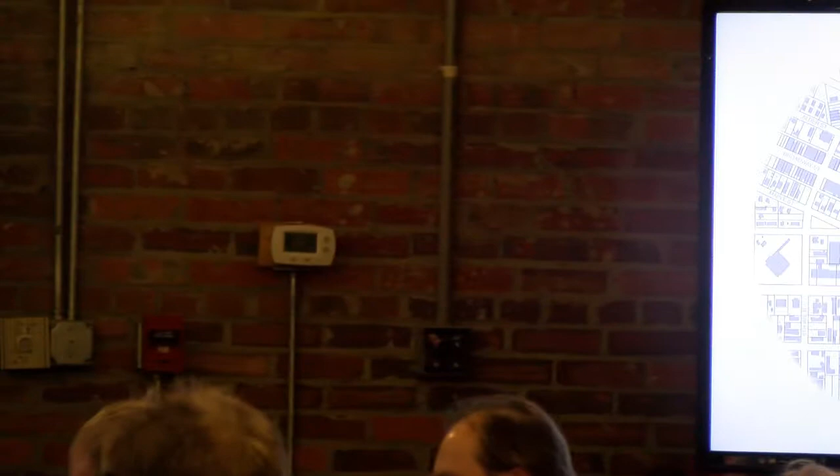Mayor, I'd like to introduce our Benchmark planning team that is here. We have Dan Douglas. Dan is from Raleigh, North Carolina. We've got Jason Epley, who's from Charlotte, North Carolina, and Monica Gall, who works with Jason in Charlotte. These guys have been tremendous. We are very lucky to have been introduced to them, and we're glad that we chose them to be a part of this. They're really giving us some great examples and recommendations, and I'm excited for you to see them. So with that, I'm going to turn it over to Dan, and Dan's going to take over.

Thank you, Lauren. And I want to also thank Lauren's staff, Brian and Frida, who've been very helpful to us throughout this whole process with logistics and setting up all the various meetings. So tonight we're going to present on the walls. You see a variety of conceptual development options for different parts of the city, and on each table there is an 11 by 17 version of those that we're going to ask you to write on and provide feedback on, and leave at the table when you leave.

So please don't take it with you, especially if they have writing, because this is how we're collecting your feedback tonight. And there should be a full set that includes every one of the posters you see on the wall. So if it's a little too small and you can't read it, you can always go up to one of the bigger ones. And I'm going to present a sort of summary of how we got where we are today, then a summary of these sketches, and then we're going to ask you to spend about 45 minutes talking about the different concepts, what you like about them, what you don't like about them, any other ideas you might have that we didn't uncover in our listening sessions. We want to hear those.

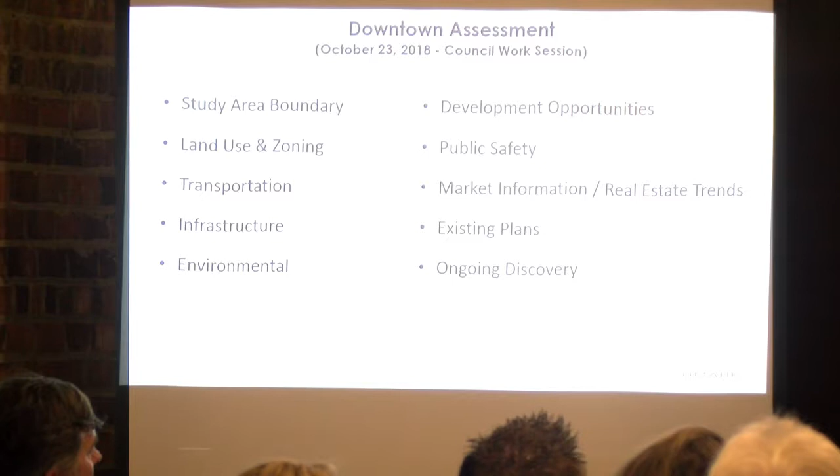And so let's start off with the vision. And we tested this through the council in 2 council meetings that were open to the public. And what the vision statements you're going to hear are, and that are written on the boards back there, is we're describing the future as if it already happened, right? It's not a we want. You're describing it as if everything in this plan has been implemented and the future that we all wanted is here. So you've done some vision workshops with the chamber, and the DRC did an internal one.

And we think, geographically speaking, that downtown is sort of split into 3 different identities. From Kings Highway to the ocean is sort of oceanfront. It's mostly hotels focused primarily on tourists. And then you have the Kings Highway corridor, which is not that different than any highway corridor or bypass in any city you've been in that has the fast food joints and retail establishments, those sorts of things. And then you have, we call it historic Main Street, but here it's called Broadway. So then you have this historic Main Street district. And what links all those together is the pavilion, the super block, and the building we're in now. So this is kind of the key link that brings all of those various districts together.

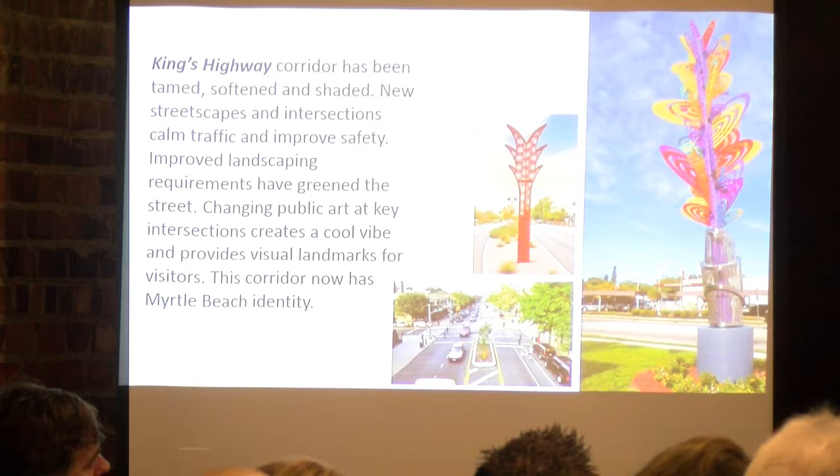Right, so if you drive Kings Highway from Georgetown to the North Carolina line, I'm willing to bet it'd take a special person to know what city you're in. It's gonna be pretty much what we call generic the whole way. It's the same stuff you see everywhere. So we heard that you want this section of Kings Highway to have a unique identity.

Broadway, Main Street, the historic heart of downtown, is flourishing. Empty nesters, young couples, and families are living, working, and playing along the street. Most neighbors in the revitalized residential areas surrounding downtown just walk and bike to Broadway on new greenways, trails, and sidewalks. Small independent services, professional offices, and retailers are taking hold, and locals have reclaimed Main Street.

And then the Arts District is this super block to the pavilion, basically where we're standing now. The Arts District is a perfect weave of arts, culture, craft, and creativity. It draws locals and visitors year-round with live performances, craft beer and spirits, a small food hall, and a market, all in unique and historic structures. Across Kings Highway, the Old Pavilion is a lively, new mixed-use destination that delivers thousands of daily visitors.

So those are the sort of four overarching statements that are guiding the development of the plans you see on the wall and on your table. And we're happy to edit them. You can make changes on a Post-it note, and they're all just on the way out the door there. The posters have that text.

And so the goals, themes, and strategies were where we tried to, through all the listening sessions and everything we heard, group initiatives and concerns around similar topics. So we heard a lot about we have to create a new identity and a niche in the marketplace that's different than the rest of the coastal environment. We heard almost in every meeting about the perception of safety in downtown, whether it's real or imagined, and what we can do to try to address that.

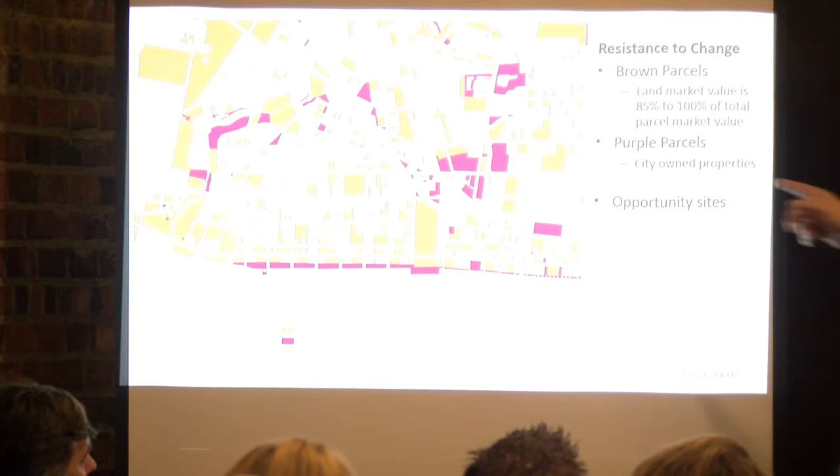So this highlights any place where there's vacant land, surface parking lots, or places where the value of the building is less than the value of the land. Everything here in the ochre color meets that category. Everything in the pink is publicly owned by the city, the county, or the state. Okay? And so out of that we developed, and this was presented to the council and through the workshops, a sort of development framework, which is how are we going to organize ourselves?

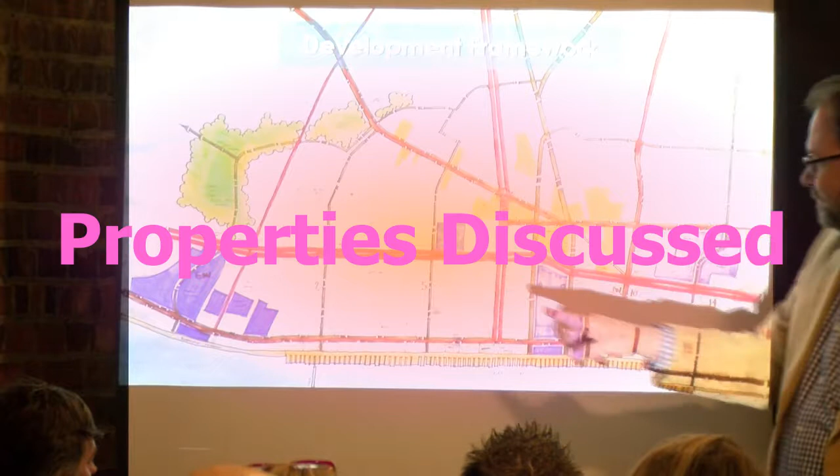So here you have the boardwalk, you have the new 501 connection to Ocean Boulevard. This is Kings Highway, and everything in yellow here is some of those prime redevelopment sites as it relates to the super block, and then these green lines from the boardwalk on Family Kingdom, 2nd Street, 5th Street, 10th Street you already did, Joe White, and 14th Street. We're saying that on those streets, to bring the energy from the ocean development inward, people do that on foot. So on these streets, the needs of the pedestrian and the bicycle come before the car.

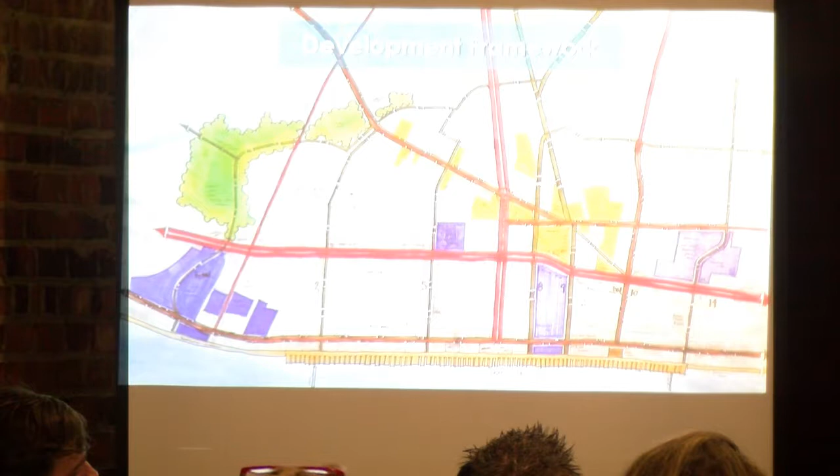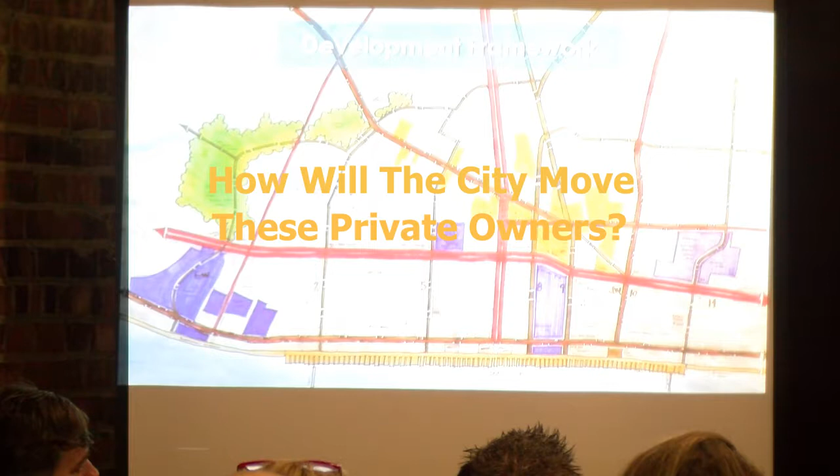On these three streets, 2nd, 5th, and 14th, you would narrow the street to as narrow as you can make it, two 12-foot travel lanes, two 8-foot parking lanes, and then the remaining 50% of the right-of-way you give over to bike lanes and wide pedestrian sidewalks and landscaping. The other streets can develop however they want, but these link things, right? The shopping center here, the old high school site, when that redevelops, 14th Street will link that to the beach.

At some point, the post office is going to move. It's not typical anymore to have a sorting facility right in the middle of a downtown on the highest valued land. You can often trade with them if you develop a relationship with the local director of the General Services Administration, the GSA. They typically don't like to sell, but they're happy to trade. And so 5th Street would link to that. 2nd Street links up through the Withers Swash neighborhood to Broadway, and then the boardwalk and the Withers Swash Greenway follow that same connection, but another piece can branch off and connect the neighborhoods to the south and east.

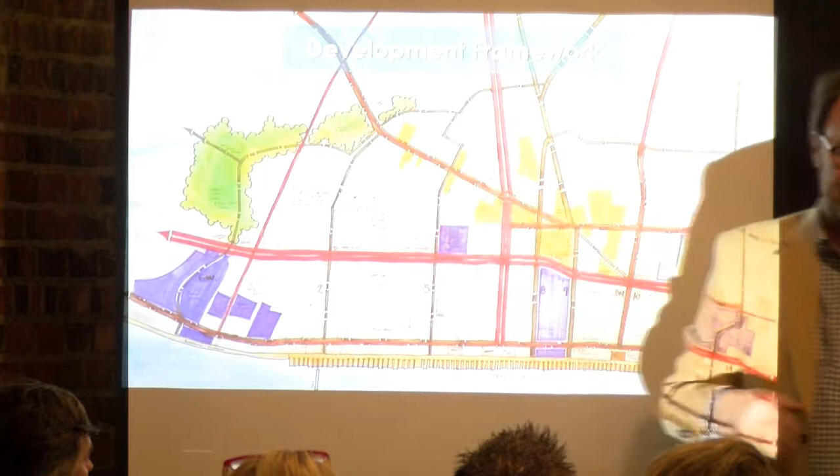Okay? And so this drawing here by Frida is where all the master plan concepts are on one piece of paper. So you see the green streets at 14th, 10th you already did, 5th, 2nd, and then the connection of the greenway through. And then the purple sites are sites that we didn't plan for because we think they're future tourism attractors, tourism destinations, like the pavilion, like I just mentioned about the post office site. Of course, the Family Kingdom is already a destination but could expand, and then this old shopping center site here.

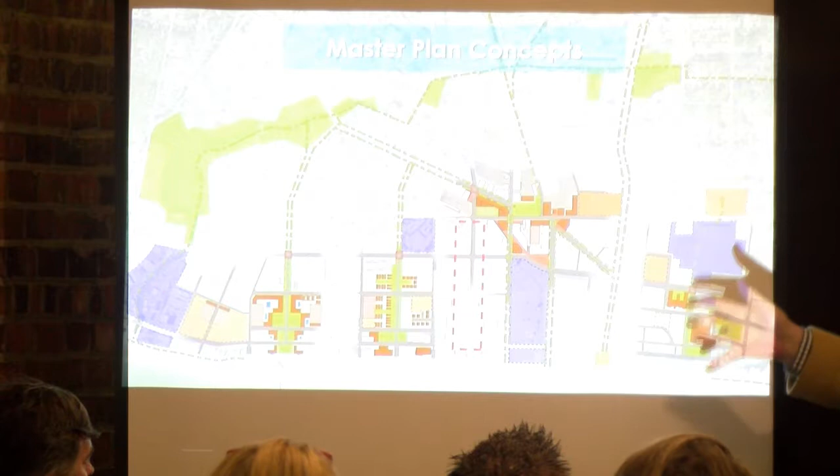And so the idea is, if somebody comes to town with a great new idea that's been developed in some other beachfront community and was really successful, I don't know, based on technology, I don't know what this idea is, but in the past, I think you would only say, well, we have the pavilion, you should really go talk to Burroughs and Chapin, and that's the only site we have.

And so what we try to do is say, no, it's really not the only site you have. You should look and market all of these for opportunities based on the specific attraction and what it wants around it and in its context and how it wants to complement other things. So what we're saying is you still have some big opportunities out there on land that's fairly easy to assemble to make a big move in the tourism market, whatever that is. We're not tourism planners, so I don't know what the next big thing in tourism world is, but somebody out there does and can help you get it on one of these 4 sites.

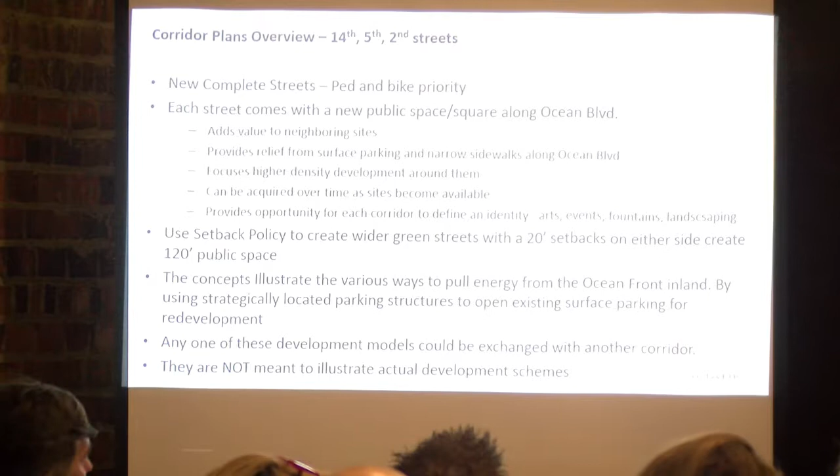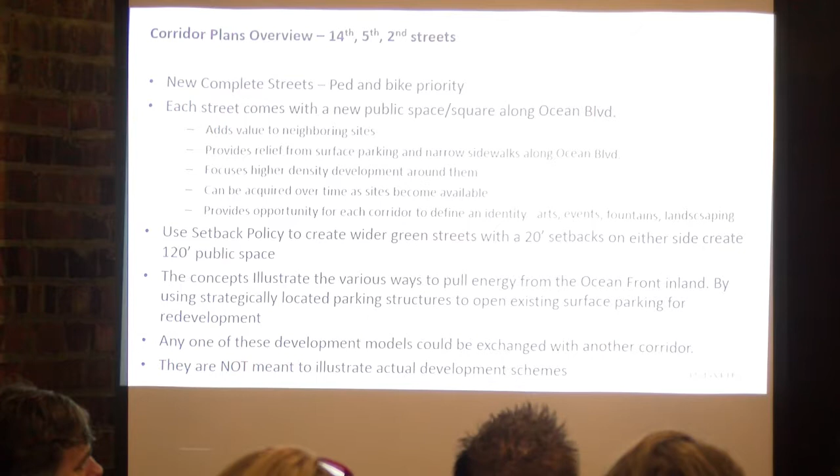Okay, so I mentioned about 14th, 5th. There's a complete streets, ped and bike priority. Each one comes with a new public space or square along Ocean Boulevard. So the idea is to create along Ocean Boulevard a different experience here in the downtown segment than it is other places. And so you would develop these little green pocket parks between Bragg and Ocean, sometimes going a little further, that would attract new development around it. So hotels, residential, they love to be on public spaces, with fountains and lights in the trees and public art. And so this adds value to the sites around it that you can capture through increased property tax.

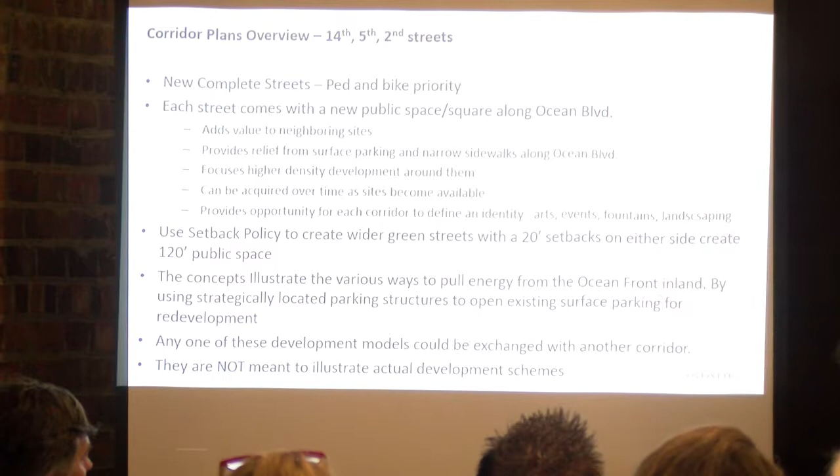There'll be a relief from surface parking and the narrow sidewalks on Ocean. So if you're walking Ocean Boulevard, this is a chance to get off the sort of crowded sidewalk and into some green space, take a break, get in some shade. It focuses the higher density around them. And we're not suggesting through this plan that you go out and try to acquire all these parks tomorrow. This is something that can be done over time as opportunities present themselves. And in fact, it doesn't even have to be in the exact same locations that we've outlined in the plan. It can be in other locations.

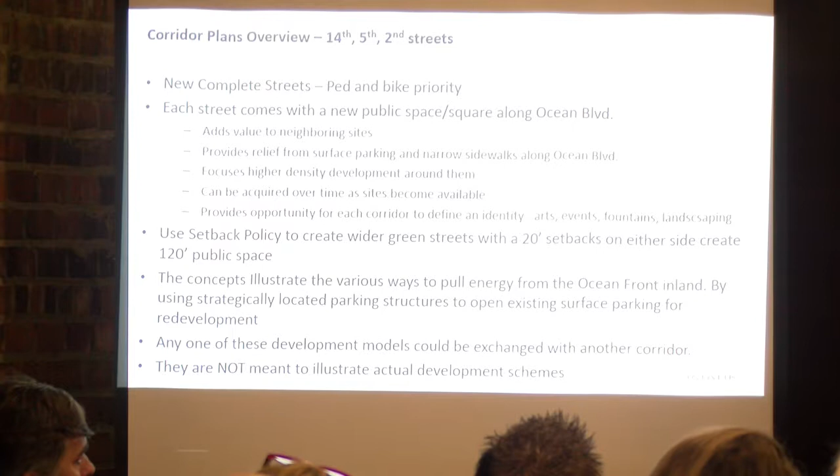We've heard in a lot of listening sessions that you have sort of Chapin and Plyler Park to the north. I'm gonna call it north, I'm not sure what direction it is, that way. And nothing to the south till you get to the Withers Swash, nothing in the urban built-up area. So people in there are saying, we need parks and green space too. So this is a direct reaction to what we heard in the listening session. And it provides for each one of these corridors, 2nd, 5th, 14th, to develop its own identity through art, events, fountains, landscaping. So these parks won't all be the same. They should reflect the identity of the corridor that they're on.

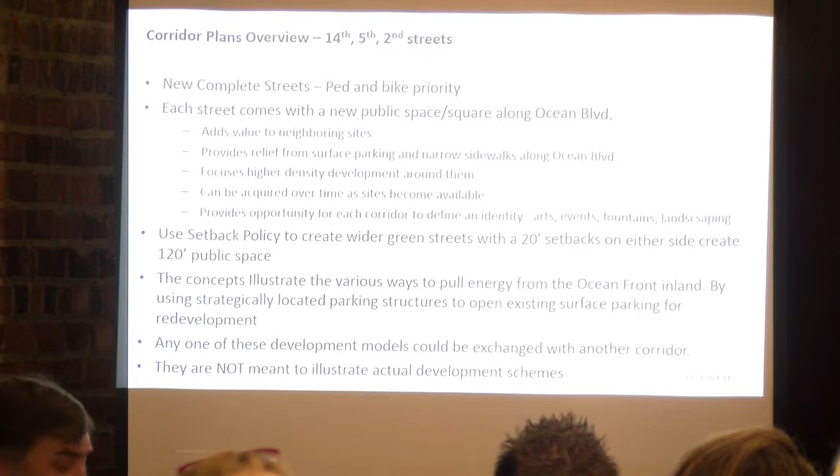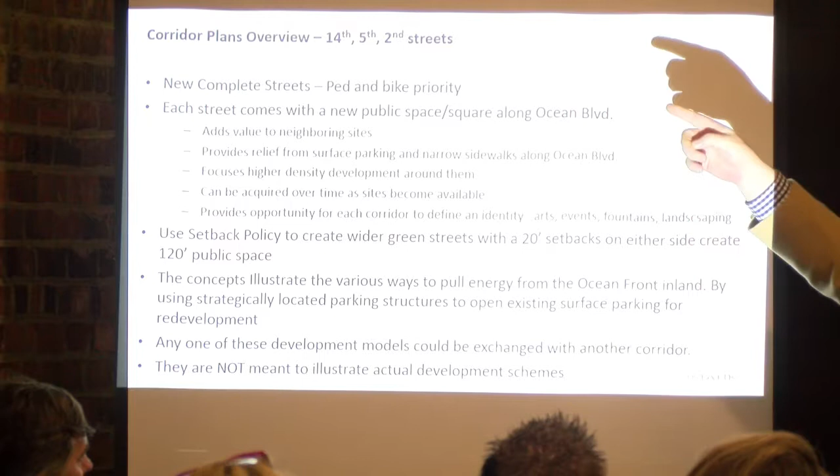And so instead of having to acquire all that land at Kings Highway, we think you can, through policy, create a setback policy, which means the line at which the building can go no more forward to the sidewalk. Right? So many urban areas have a 0 setback policy. So the building comes right down to the back of the sidewalk, no green space. And so we're saying on these streets, maybe you could have a 20-foot setback. You already have an 80-foot right-of-way. You own it as citizens. So 20 more feet gives you a 120-foot wide green corridor that goes all the way out to Kings Highway and across. And that sends the signal that this is a special place for pedestrians and bicyclists.

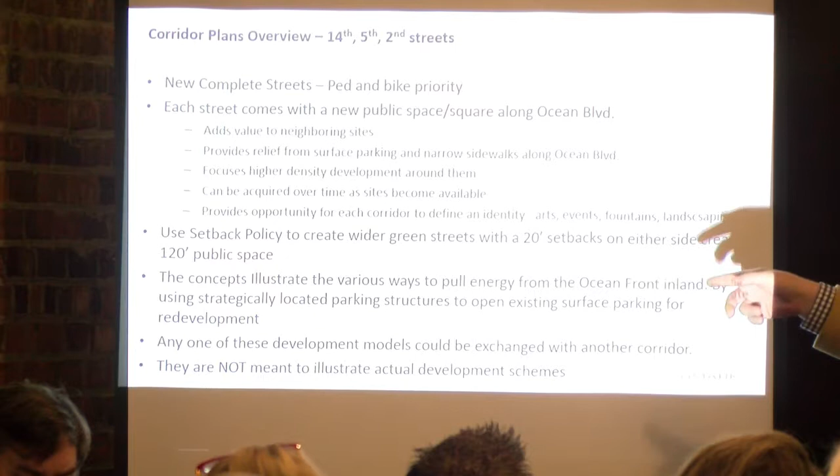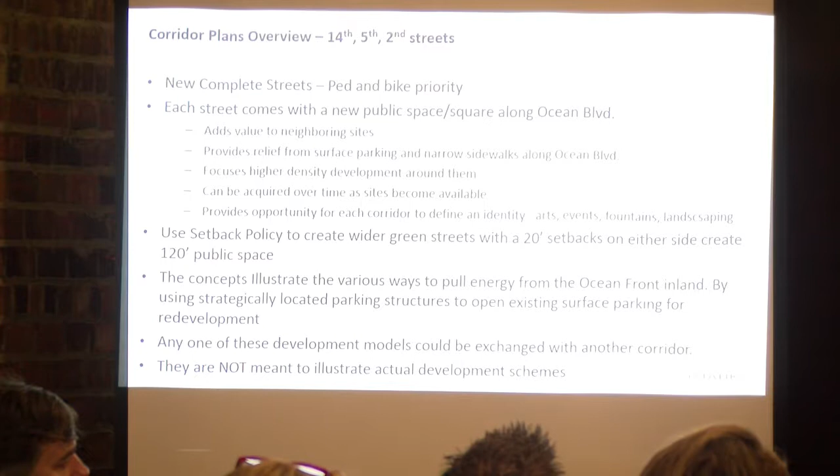The concepts that you see on that wall, they are not illustrating specific concepts for those corridors, but rather we heard over and over, how do we pull some of the energy and the value that's on oceanfront land further up the hill and to the 2nd and 3rd and even 4th rows going back. So we looked at 4 different ways to do that, and they're all on that wall. I'll explain a little bit about it as we go, but I want you to think, these aren't specific plans for those corridors. The plan that's on 2nd could easily be developed on 5th or on 14th. So when you look at these plans, don't think, oh, that's not gonna work here because of such and such piece of property or something like that. That is really just to illustrate some different options about how to bring that energy back. Okay.

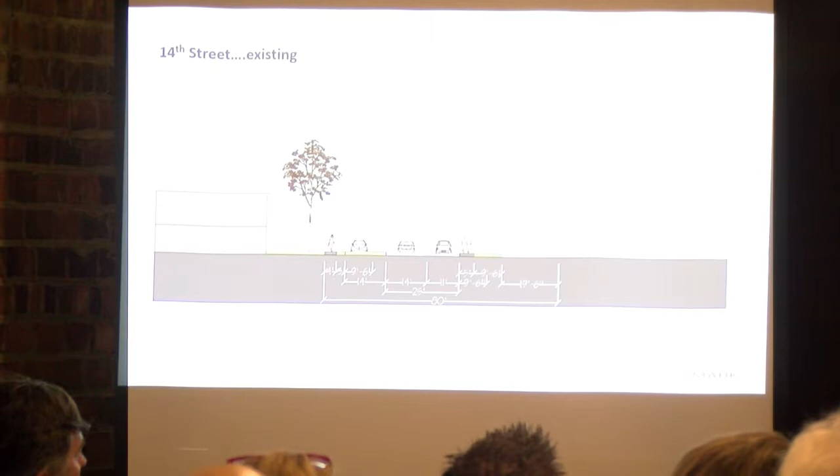So we'll cover 14th Street first. This is the existing right-of-way. There's no curbs. There's a 14-foot lane, 11-foot lane, and a lot of parking that is head-in parking that basically, when the entire length of the block is a curb cut where cars can come and go, you're basically telling pedestrians, this is a place for cars, not you. Cross this parking lot at your own risk, even though it's the public right-of-way.

So that's what's going on now, and here's what we want it to look like in the future. As I mentioned, two 12-foot travel lanes, two 8-foot parking lanes, a 3-foot row of palms, and that allows the car door to open without it entering the 6-foot bike lane that's dedicated for bicyclists. So no more riding in the street and no more riding on the sidewalk on these corridors. So you have a 6-foot lane in both directions, and then an 11-foot sidewalk. Wide sidewalks for lots of pedestrians.

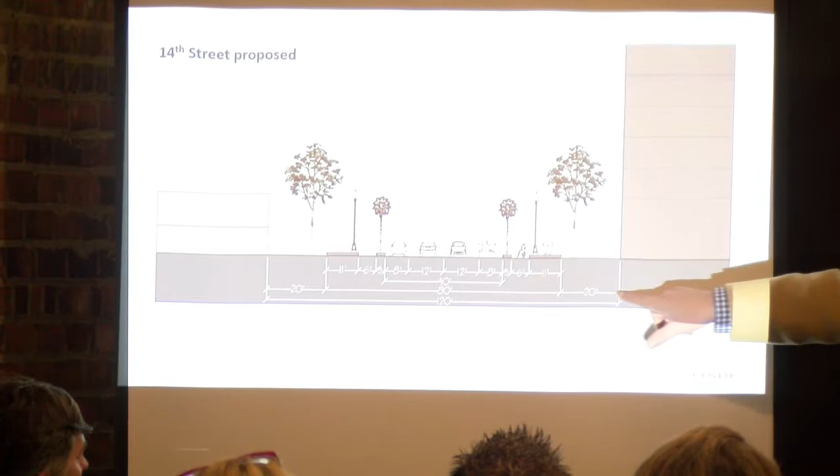The sidewalks on Ocean Boulevard are too narrow. They're just way too narrow. And then this is the 20-foot setback I mentioned on either side where the buildings start. And so if you develop that as a policy, you end up with a 120-foot wide green corridor on these streets out to Kings Highway.

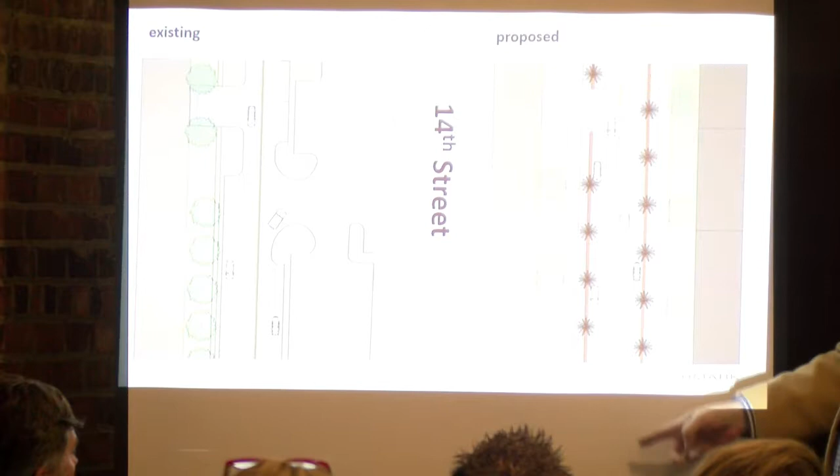So here's what it looks like in plan. As I mentioned, there's lots of curb cuts and cars parked everywhere. And what we're saying is, let's regularize it. Two travel lanes, two parking lanes, the bike lanes and sidewalks, line the door swing area with palms, and then more trees in the setback to create this sort of image of what these important east-west streets are in Myrtle Beach. So this is one option to look at how to bring that energy back.

Here is the Tin Roof and Riptides. So that's an unusual situation where you have a 3-story building on the oceanfront. Most of them are in the 15 to 20. And this presents one unique opportunity. So you have a 3-story building on the oceanfront. The next row back, you could do a 4-level parking deck with 4 or 5 stories of hotel or condo or apartment on top of that, and they all get an ocean view over Riptides and Tin Roof.

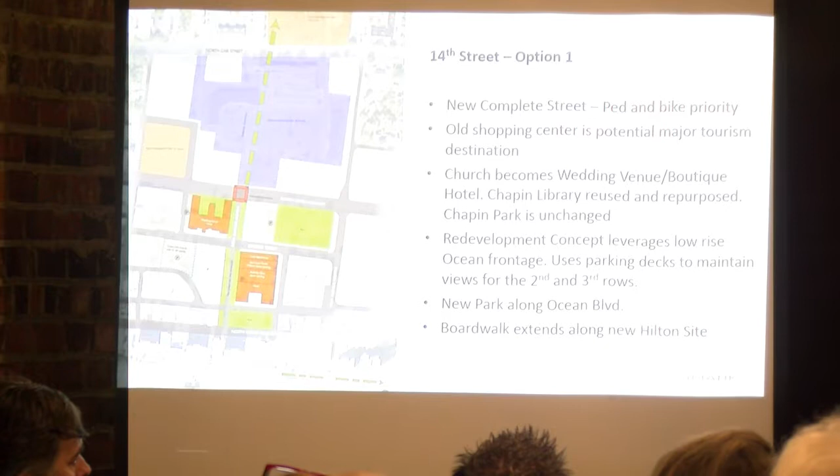And then in the next row back, there's another parking structure and a taller apartment building on that is maybe like one of these 20-story towers. And so now you've set up this situation where the ocean's over here, and as we step back, it gets taller and everybody gets a view. That's one way to move energy back from Ocean Boulevard onto the 3rd and 4th row. And while we're showing it here on 14th, it could apply to any of the corridors.

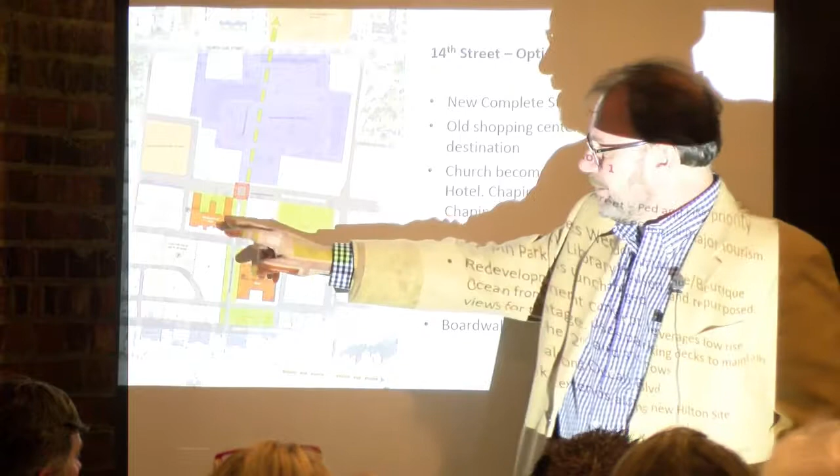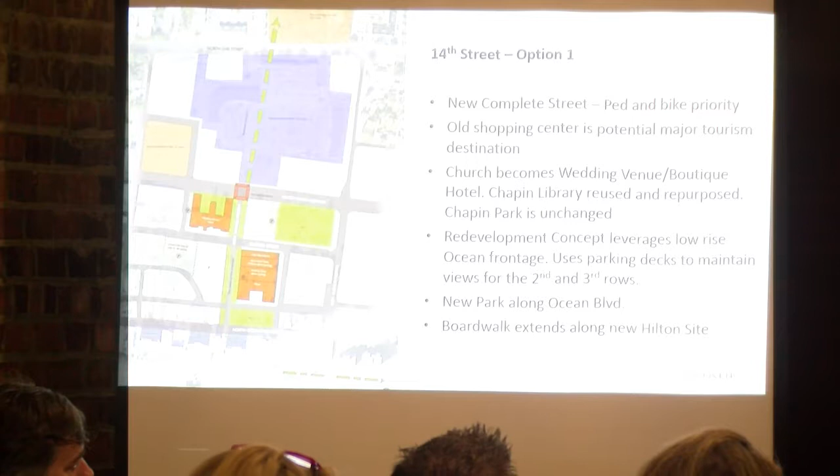We know that the church, I forget the denomination, Presbyterian Church is on the market today, and we spent a lot of time thinking about what that could be used for. One option is a new city hall, that City Hall may move over there. They're in the process of exploring that, getting numbers together and seeing if that makes financial and fiscal sense. If that doesn't work, we thought another option, we asked a lot of people about where's the number one wedding venue when people want to get married in Myrtle Beach from somewhere else and have a destination wedding. And we know there's a little chapel here on 501 and a couple other churches, but this could be a private wedding venue, the old church.

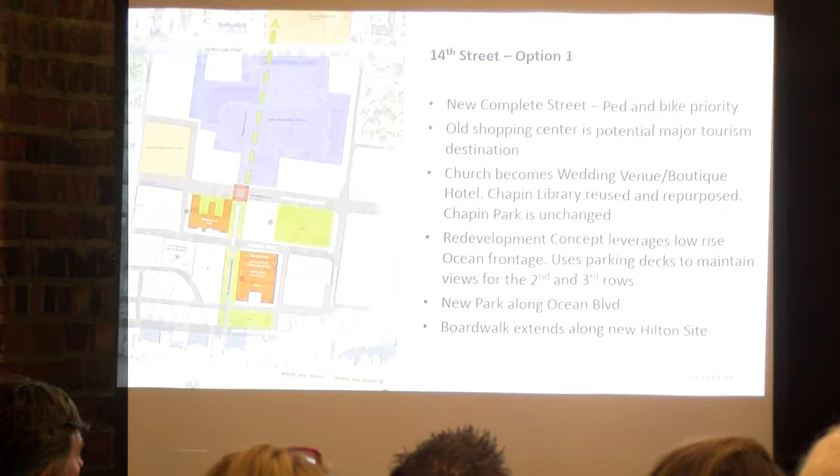So you could add on to the wings to create 40 or 60 hotel rooms, have the wedding in the main church nave, and then the reception right behind in the community. I haven't been in this church, but usually everyone has a big room where they do Wednesday night suppers or whatever that is. And then you'd have the park, the Chapin Park right across the street to take all your nice pictures and all that stuff. So that's one option for the redevelopment of that site.

Yeah. Okay, so that's option 2 for 14. So we're going to want to hear how you think about these two options, which one you like better, all that sort of stuff.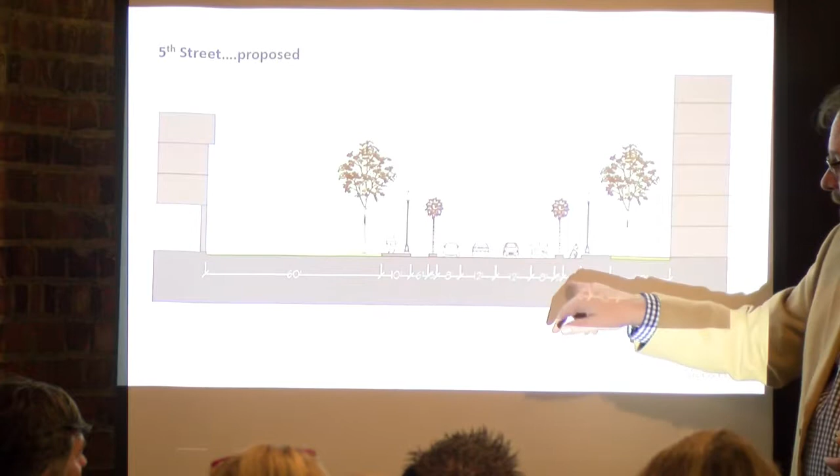Next. Now we're on to 5th Street. This is the existing condition. No sidewalks at all, 2 11-foot travel lanes, and then all this head-in parking that creates this giant long curb cut. And here's the same model as before, 2 12s, 2 8s, bike lanes, and 10-foot wide sidewalks. And on one side, maybe a bigger setback. Instead of 20 feet, maybe it's 30 or 40 feet to create this long linear green space from the ocean all the way to Kings Highway.

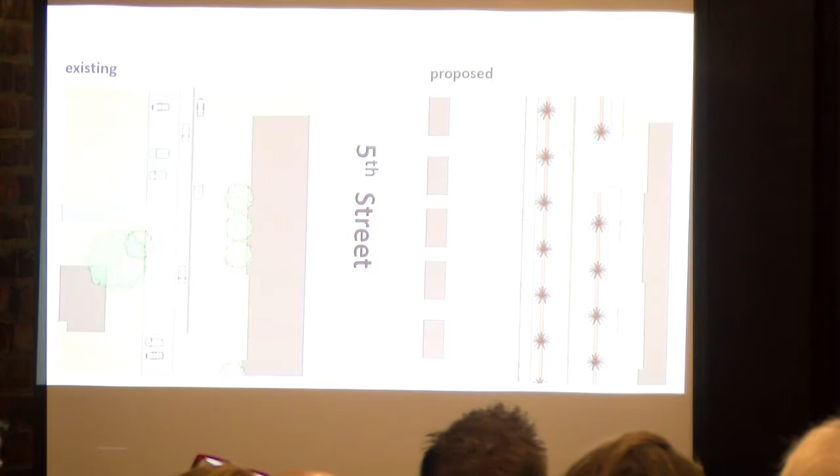And here's why that's important. Oh, here's what it looks like in plan. So this is what I'm talking about. You see this condition a lot in Myrtle Beach, where the public right-of-way where sidewalks should be has been completely given over to the storage of cars for some private use behind the curb. In most cities, that's forbidden. That's not allowed to be done.

And so the idea to fix that is to regulate it all and just have on-street parking and no more head-in parking, and to make sure there's wide, comfortable sidewalks on both sides. So this is the existing in plan. This is it in the proposed.

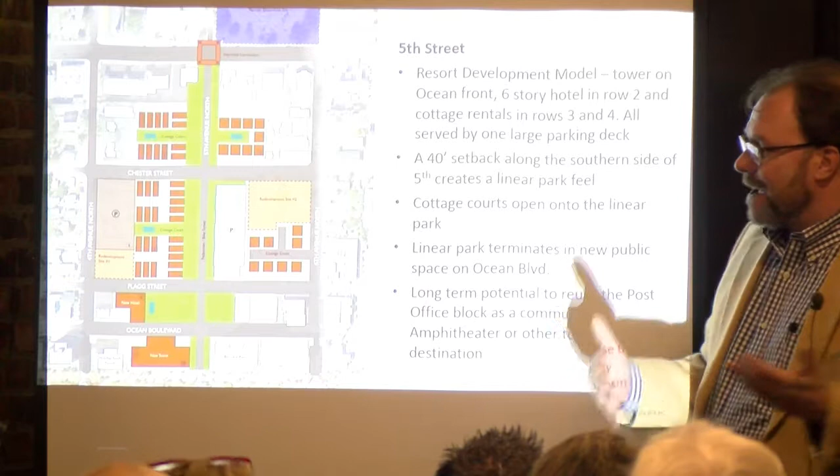And so here's another option for how to bring that energy from the ocean in. So in this case on 5th, there's a vacant lot on the ocean side where a new tower could go. And we call this kind of the resort option. Not everybody wants to stay in a big tall condo on the ocean front and pay the premium to be on the ocean front. This could all be owned by one entity. If you don't want to stay there, then one row back is a new hotel that's a little bit less in price. And you've got, of course, to walk a block to get to the ocean.

And if you don't want to stay in a multi-story building, there could be these cottage courtyards, like you see a lot further south in Myrtle Beach, these narrow, tall buildings that get rented out to families or golfers or whoever it is. One entity rents the whole house. And then each of those can have a courtyard that empties out onto that wider linear park. So it's a way to organize yourself around the park and have everything front on it. And this is only achievable if you build structured parking.

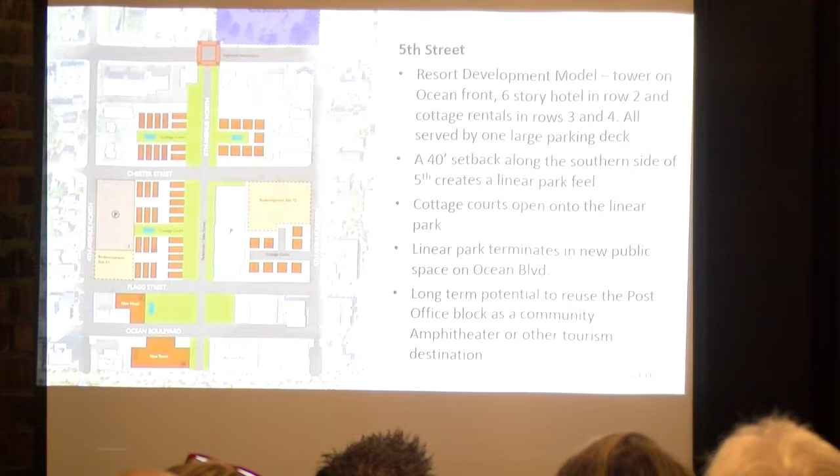If you look at an aerial photo of the ocean front in Myrtle Beach, which I've spent the last 4 months doing almost every day, I'm gonna guess about 50% of that land is reserved for surface parking, and that tells me something, as an economist and developer myself, that the land one row back is so unvaluable that storing cars on it is the highest and best use. Storing cars is the highest and best use of the land 2 blocks from the ocean. That should tell you something.

And so the way to get around that and create some value for that, and we don't think you're there yet, but we're starting to see parking decks be developed. You're getting closer to where stacking all that parking on one small lot and opening up all that land for redevelopment makes more sense from a pro forma perspective than it does today. And we think you're probably not far from that tipping point, potentially. And that's what this scheme sort of looks at.

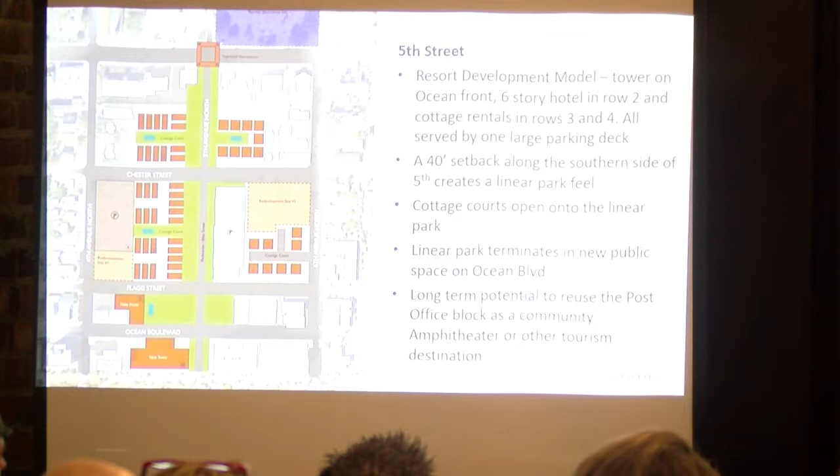So it's got the 40-foot wide setback to create the linear park, one parking structure that serves all of this new development. And the linear park terminates in a new public space on the ocean, which is now a parking lot. And at the other side, the old post office site, which I think is the perfect site for a permanent outdoor amphitheater. Because when the concert's over, people could come down this way to the ocean or turn right and go up to Broadway Street and have coffee, some dessert, a drink, whatever. And it's equidistant between the two.

So this is a perfect site for some type of tourism amenity that also really serves locals. It's not just for tourists. And the one I can think of the best is sort of an amphitheater. You said 501 to 7th Avenue, correct? Yeah, okay, it's not this way. This is Fifth. Not where it's supposed to. Yes, over here.

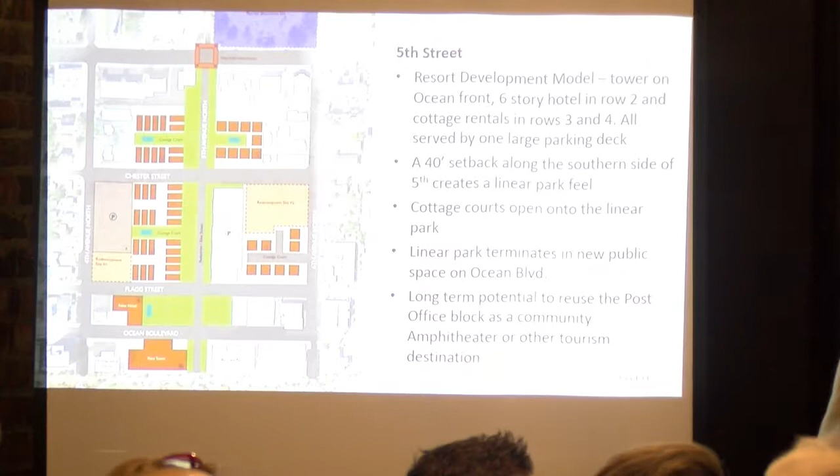Yeah. Also, would you clarify for me, you referenced the post office on Fifth right here as a closed structure? Right? No, I said it's likely a sorting facility where they sort the mail and then send the trucks out from there. That's what I've been told anyways. And in most cities where the land has some value, the post office doesn't take up a 4-acre site for a sorting facility. It can be out in the suburbs somewhere on very cheap ground.

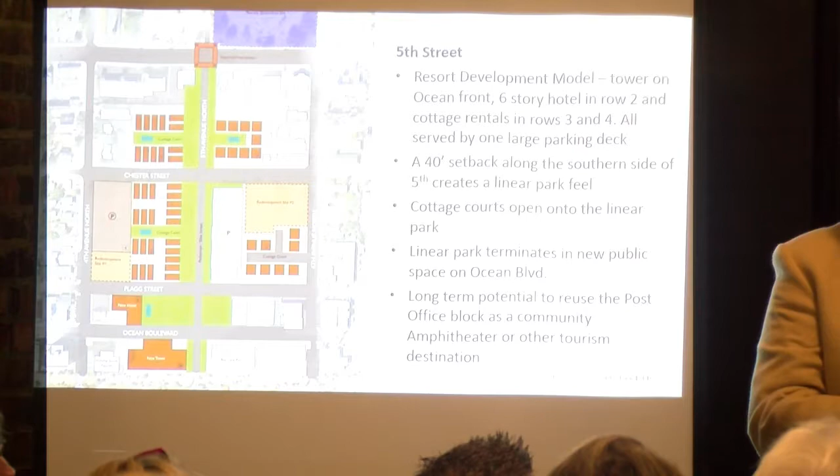And so what a lot of cities do, and what we did in Raleigh, was we asked the Postal Service. They don't want to sell it because if they sell it, the money goes back to the general fund of the federal government. They want to trade it for some land. And so the city could buy a site that serves their need, or the county or whoever, buy a site that serves their need somewhere else, and then move them to that, and at the back end, you get this one. And then the question is, what do you use it for? And what I'm suggesting is potentially an outdoor amphitheater that can host 40, 50 events a year.

The thing about Myrtle Beach is, as I drive around, you only get so many bullets when it comes to attractions, right? Minor league ballpark, sports center, where you have multiple courts in a sports center. That's a big tourism draw. Like the Top Golf thing that they're building out there on 24th Street or something. And convention center. These are your main deliverers of tourists into a city that's not on the ocean, right?

You have the ocean as your big attraction, but if you weren't on the ocean, you'd want to have your ballpark downtown, your convention center downtown, any big attractor, because you want to have all the bars and restaurants and shopping within walking distance of it, because when people leave a convention to take a break, you want them to open their wallet and spend some money here in Myrtle Beach.

And we stay at the Convention Center Hotel, and I can tell you there's no place, even if I wanted to walk and spend money, and the same is true at the ballpark, and the same is true at the sports center. So, you shot your 3 biggest bullets for attractions and put them in a place where you don't get the multiplier effect from that. And so now we have to think about what's the next level of those attractions that we can locate in downtown to get that multiplier.

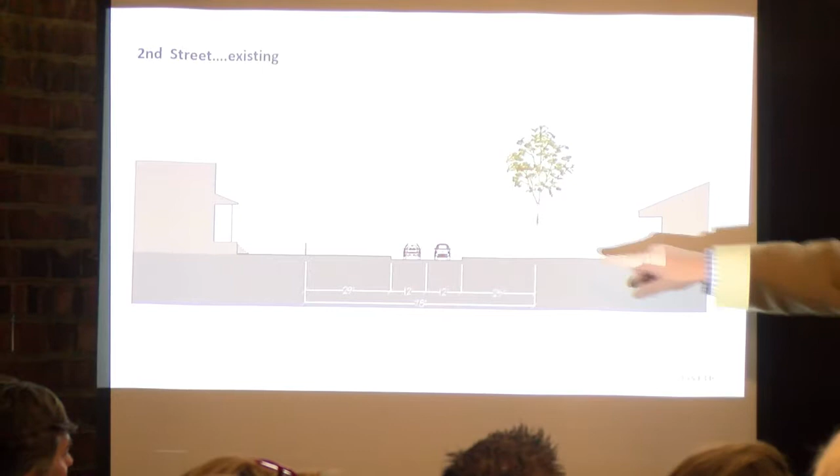Okay. So here's the existing 2nd Street. It gets to be kind of residential, so normally there's 2 picket fences here. This is all gravel parking and no sidewalk. Right? And so for a city that has 18 million visitors a year that mostly walk, to have major parts of your downtown with no sidewalks is really amazing to me in this day and age. You really have to have sidewalks, unless you're saying, we're going to give it all over to the car, they can park and run around and do whatever they want anywhere, and we'll just let the pedestrians and people on bikes dodge them.

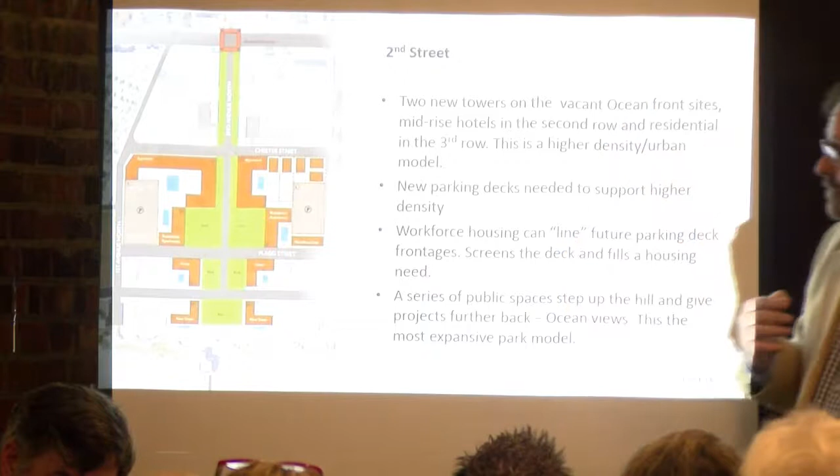Here, you have the pier and the parking in front of this green shouldn't be here. I thought that was city-owned, and now I realize it's privately owned. But there's room for 2 towers on either side of that, and so if you kept this open and even widened it out a little bit, you could develop some 6-story apartments, 3 rows back that actually have a view to the ocean through the pier, and that's pushing that value back. And the only way you do that, again, is with parking structure. So at some point in the next 10 years, you're going to get to the point where that makes economic sense, I think, in downtown. So we're trying to show you multiple models of how to do that.

One of the other little tricks we like to do a lot is when you have a parking deck. Nobody likes to really see the parking deck anymore in urban environments. So you create these things called liner buildings. They're typically about 35, 40 feet deep. They have 1 row of apartments facing out. They can be 2, 4 stories, whatever it is, made out of wood.

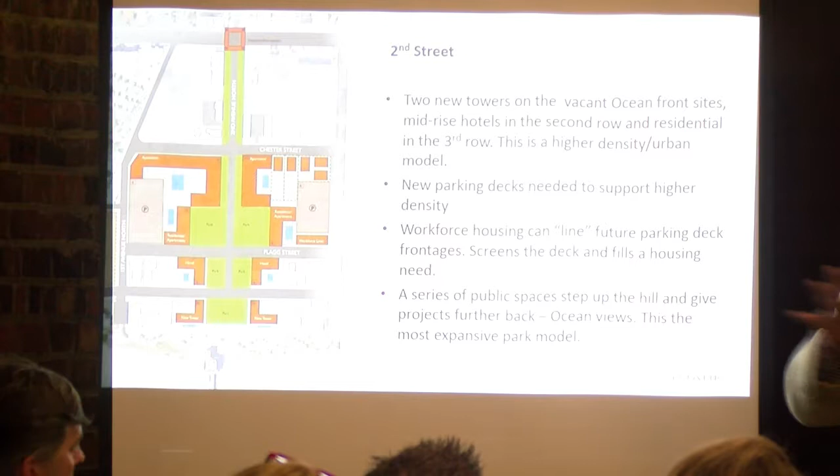And a lot of times, depending on how the parking deck fits on the site, you might just be using a leftover piece of ground because the decks have certain dimensions, 120, 180, 240 width. And so sometimes there's leftover ground. And so we're just saying if you ever have that leftover ground, push the deck to the back and build a liner building that could often be used for workforce housing, because it's made out of wood and not expensive, and because it's on a piece of leftover land.

Often cities will give that land to a developer to develop a lower rent product to be able to capture the value back through the property tax, right? Over time, you capture the value back.

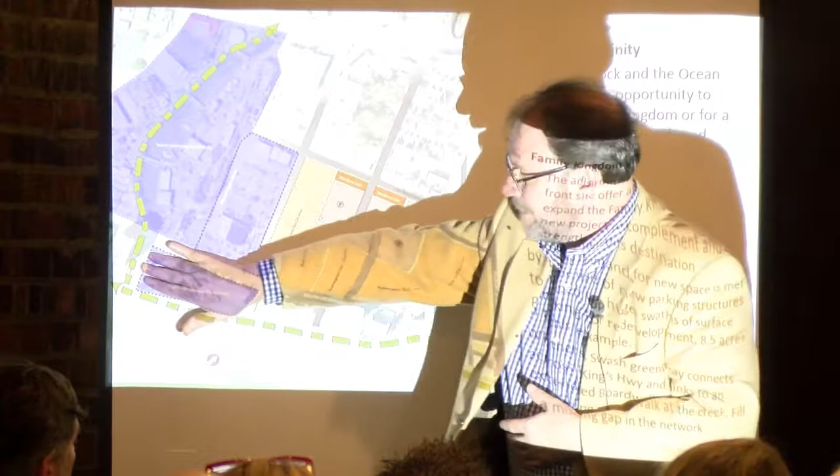Okay. The Family Kingdom vicinity. So the Kingdom's doing pretty well. There's a water park on the oceanfront, and then there's another sort of orphan block here that's a little bit orphaned from the rest of downtown. And we're not saying it needs to be part of the Family Kingdom, but if there is a new tourist attraction, I don't know what it is that would be complementary to an amusement park.

But maybe this is another opportunity like the pavilion, where you have a nice oceanfront parcel and then about a 5 or 6 acre parcel, 1 row back, that you can develop some type of tourist amenity that's complementary to the Family Kingdom and builds up more density of tourism activity at that end of downtown.

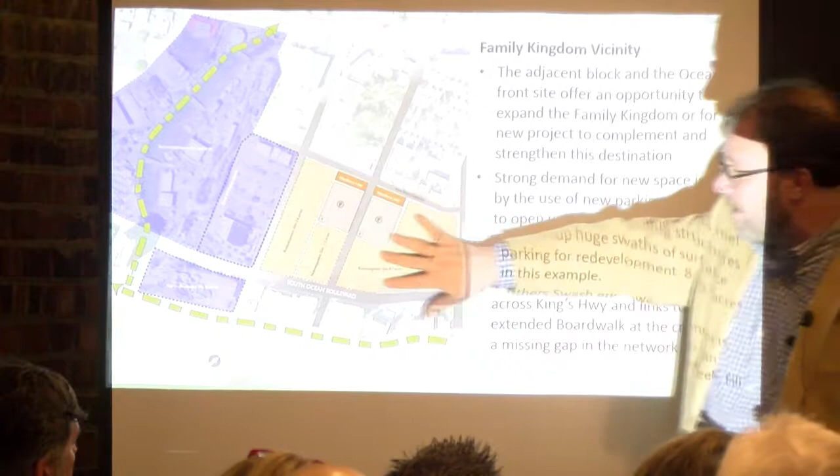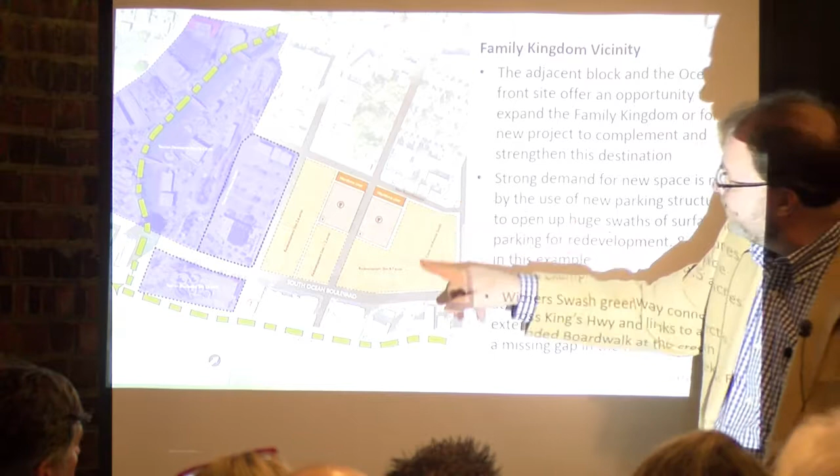And these 2 towers own basically all of this. This is all surface parking for these 2 towers, and so I thought, what if we built 2 4-story parking decks, closed this section of, I want to say it's 2nd Avenue South. Yeah, here's First. This is where you have the 2 roads. You could close that section and basically create 2 really great redevelopment sites surrounding these 2 parking decks, and that could be any type of redevelopment.

And then lastly, we know there's some issues about extending the boardwalk down there related to coastal, what's it called, the plant line or the dune line. But we really think to make this network work, it doesn't have to be the exact same condition as the boardwalk is the rest of the way.

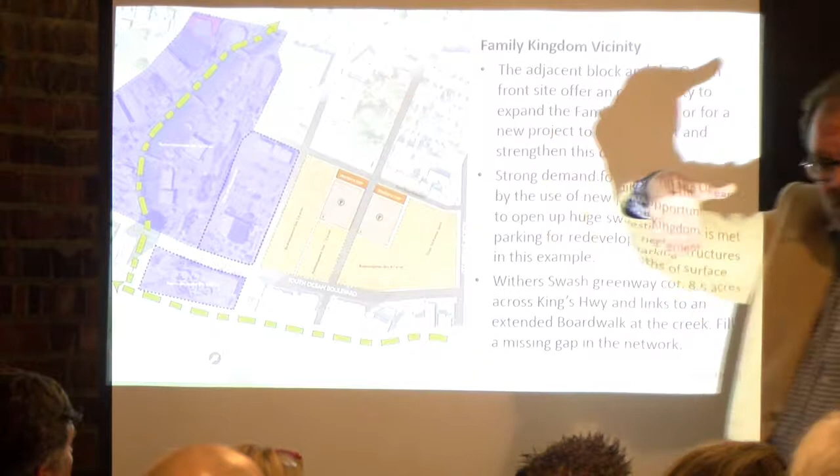Maybe it's a little closer, maybe it's made out of wood and a little bit narrower, but it's important for people to be able to walk down there, connect to the boardwalk at Family Kingdom, and then work their way up through Withers Swash and be able to get to all the neighborhoods up there, again, riding or walking without having to have the conflict with the car. You feel safe as a grandparent walking this path with your 8 or 9-year-old granddaughter. You only have to make one dangerous cross, King's Highway, but the rest of it is all conflict-free.

Yeah, nobody uses a skywalk. I've seen them built everywhere. You think people want to walk up the stairs, across and down? They don't. They'd rather dash through 6 lanes of parking. I can show you picture after picture of people doing it. The same is true with tunnels. Tunnels scare people more than skywalks. But very rarely will you see someone walk up 25 stairs, across, and then walk back down. They'd rather just dash. Yeah, it's tough to run outside.

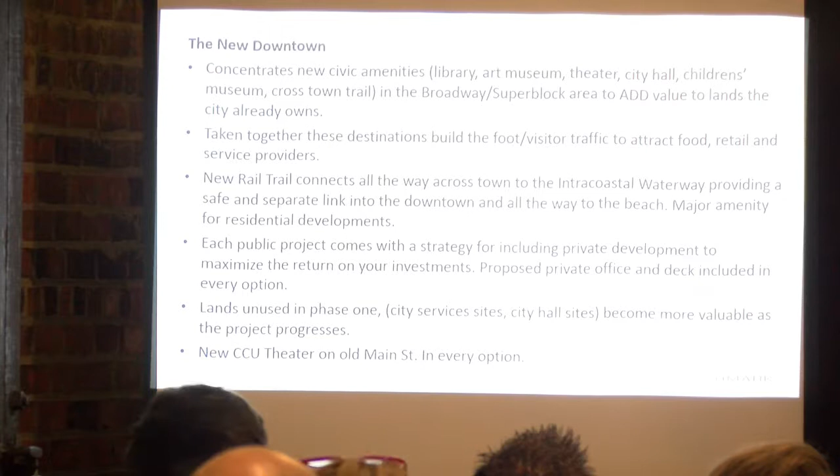Okay, so now we're going to move to the super block area, which we're calling the new downtown. These are some common elements and themes that are applicable in every one of the 3 options on that wall right there. Number 1, to concentrate new civic amenities, the library, art museum, theater, city hall, children's museum, the crosstown trail, whatever we can think of, in the Broadway and super block area to add value to the lands that the city already owns. So you're thinking like a developer now, right?

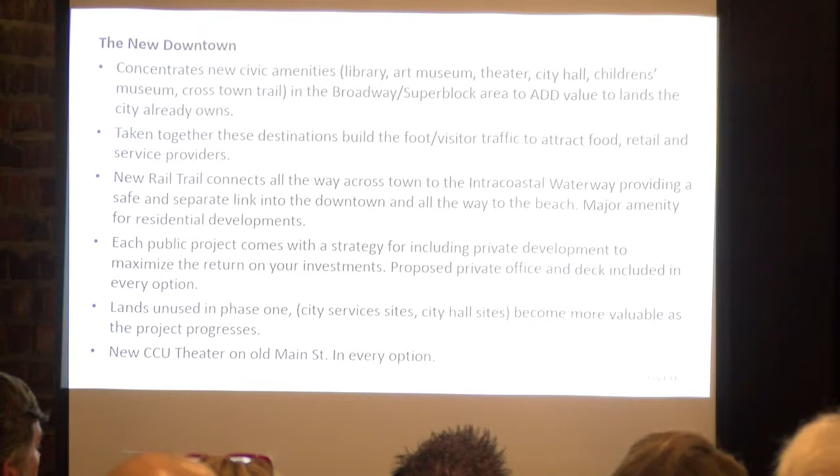When you see a new subdivision, the person that buys the first lot in that subdivision, when there aren't any houses, maybe they pay 40 grand for that lot. The person that buys the 45th lot is gonna pay 60 grand because all those other houses have now added value to that lot. And so we're suggesting you do the same.

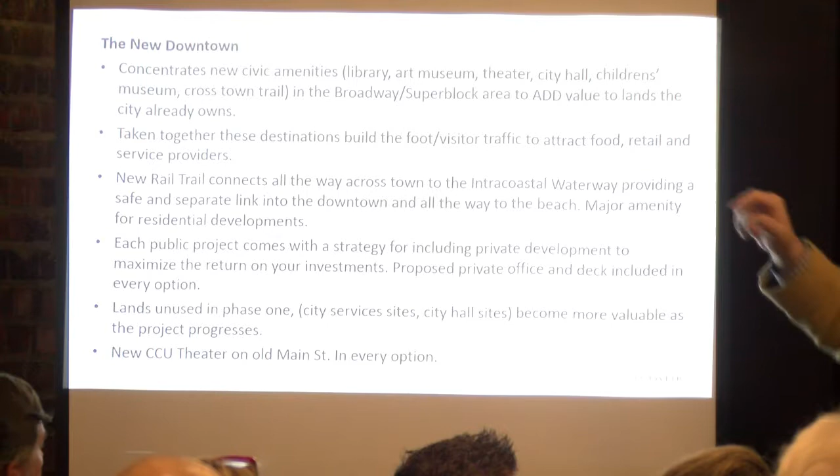And because most of your big attractions, as I mentioned, are already out on Grissom, these are what's left: library, art museum, theater, city hall, children's museum, and the crosstown rail to trail. Those are your big generators of local visitors to this part of downtown. And taken together, they can build the foot and visitor traffic to attract food and retail and service providers.

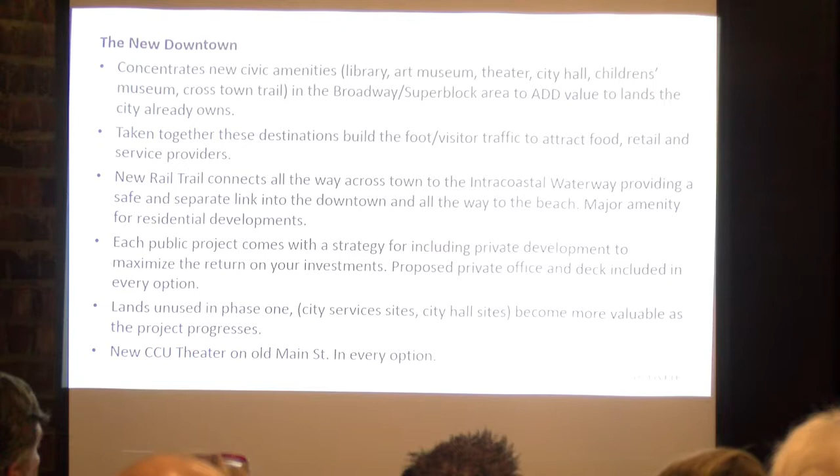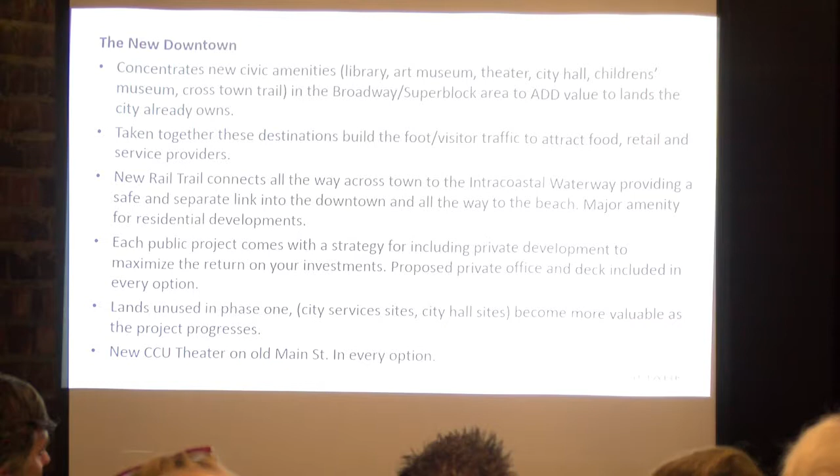The new rail trail can connect all the way across to the Intracoastal Waterway, providing a safe and separate link into the downtown all the way to the beach, and becomes a major amenity for residential developments. People love to live on trails where they can walk and bike and exercise, walk their dog especially. And each public project that I listed up here, in almost every scheme, comes with a private development opportunity too. So the library and the art museum can have 2 or 3 stories of apartments on top of them.

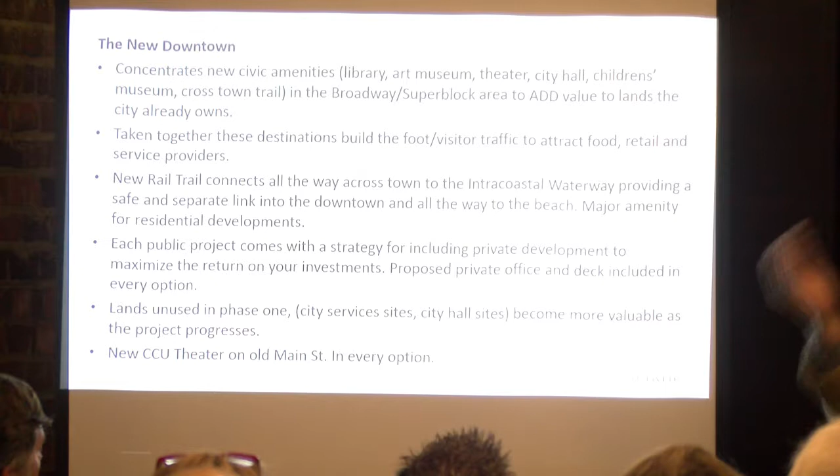The city hall could have an apartment building adjacent to it that shares the same surface parking lot, because when all the city employees are at work and need that parking, all the apartment dwellers are at work somewhere else, and so you can share the parking. When they come home to get to their apartment, all the city employees go home and those spaces are empty, so you can double dip and share parking, which is a really expensive piece of infrastructure.

And then lands unused in phase 1, the city services site, the city hall sites become more valuable as the project progresses. And the new Coastal Carolina Theater on the old Main Street, you'll see in every one of the options.

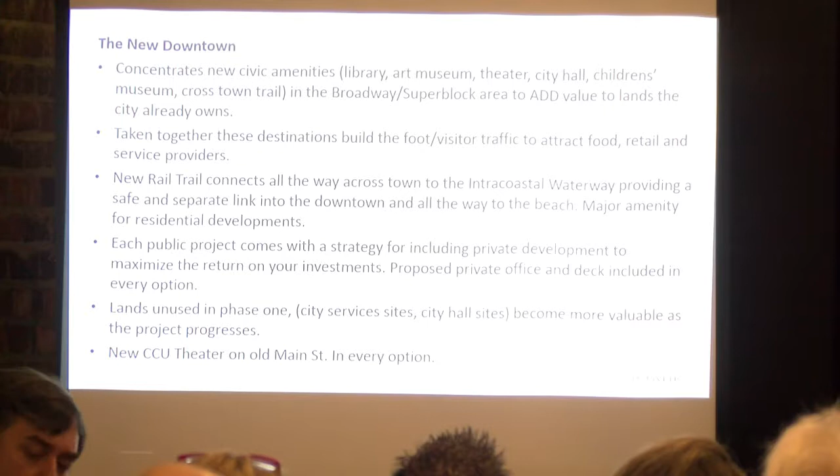So those are all within one block of where we're standing right now, and the grand total is 335,000 potential customers that are going to come within one block of the super block, and it's the business's job on that block to get them into their business and sell them something. That's a really big number. That's the number of our Performing Arts Center in Raleigh that we spent $120 million on to get that same number of visitors.

The big unknown, of course, is what is the redeveloped pavilion site going to generate? When it eventually redevelops, it's going to be at least that number, maybe higher. So that's a whole lot of people coming into these 3 blocks between 7th and 8th, 8th and 9th, and where we're standing right now. And that becomes a market. That's a market for restaurant, retail, coffee, you name it, service, local service provider.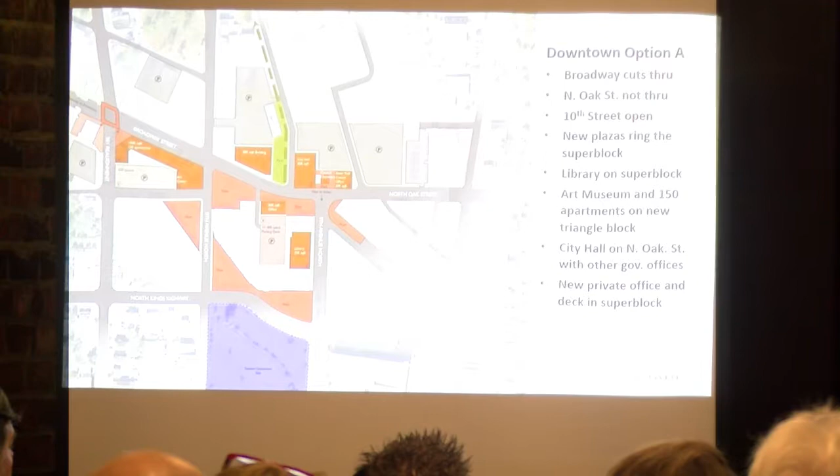In each scheme, you'll see a private development in the middle of the super block. We met with a business owner who's interested in moving his office project potentially into downtown. It's going to be about 50,000 square feet of office space, maybe expandable to 75. About 250 employees, needs about 400 parking spaces. So he's interested in being right in the super block, so the deck would be right in the middle and the office piece would be on the top.

Here, the city hall is closed and the new one is open here. Literally, right out that door where we're standing, this is the depot where we're meeting right now. The Greenway Rail to Trail comes right into a little park. There's a private development here, and then here is the art center and apartment building with parking there. That's the sort of change as little as possible scheme.

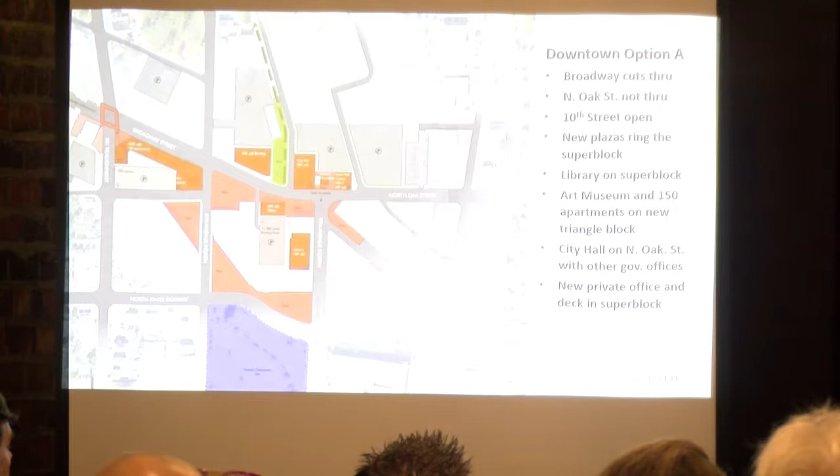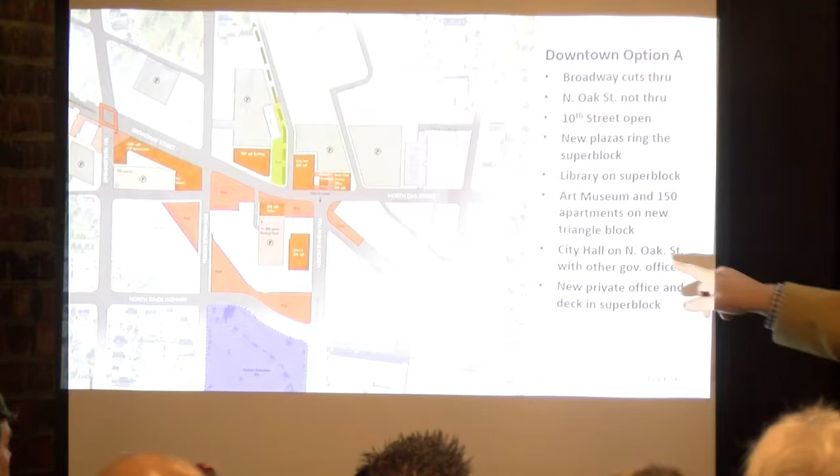So you get new plazas ringing the super block. The library goes on the site that was originally identified for the library in the super block section on 9th. The art museum and 150 new apartments come into the triangle block here that's created by the new 501 realignment. City Hall goes on North Oak with some other government offices.

A lot of people suggested that we create kind of a government center so you have the City Hall, but then you have some county, some state, and some federal employees that have offices in town. Maybe they could all be together next to City Hall. And then as you grow, which you are quite fast, in 20 years, rather than building a new City Hall, you just ask those other government entities to leave and expand into the district. So this is future growth for you. And then the new private office and deck is here on the super block. So that's option A. Next, please.

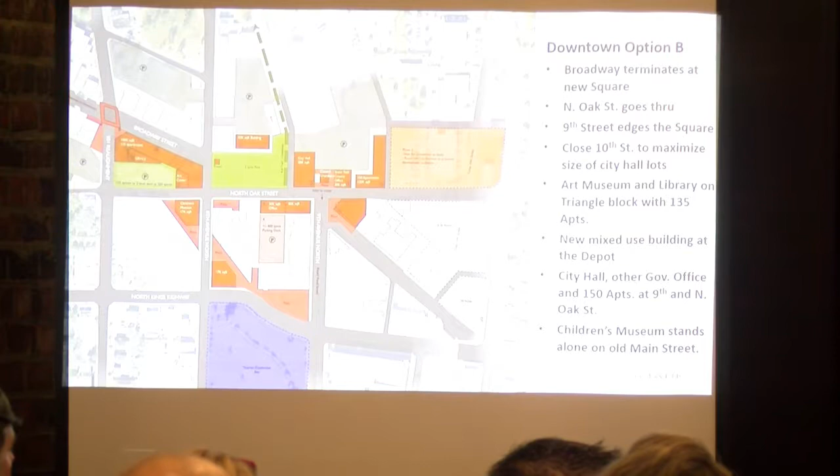This is option B, and so directly in front of us, we introduce a new public space, about 2 acres, and we do that by closing Broadway just in front of us. And so Broadway now comes to 8th Street, comes down, and North Oak becomes the main connection from the north to 501.

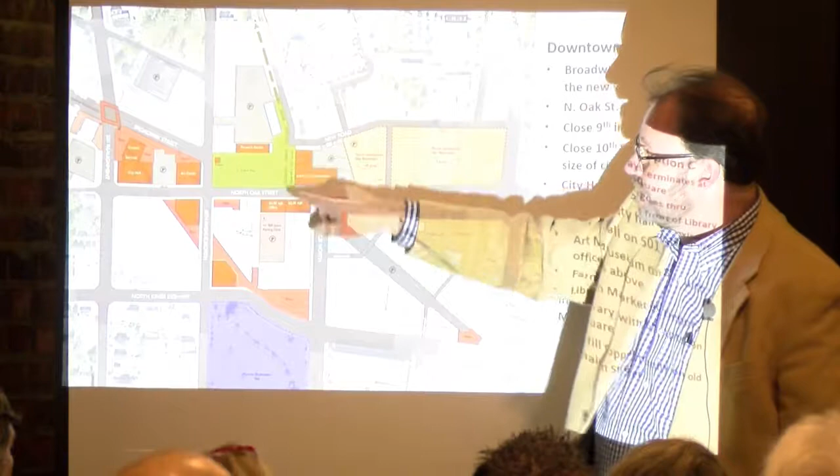Broadway would still be coming from the south in this intersection, so you sort of split those two. Here in this option, you close this little section of 9th Street, and so the library fronts directly on this new public green, Village Green. Opposite it is the art center or art museum with a couple floors of office on it, parking in between, and then City Hall right here on the gateway into downtown, coming in on 501.

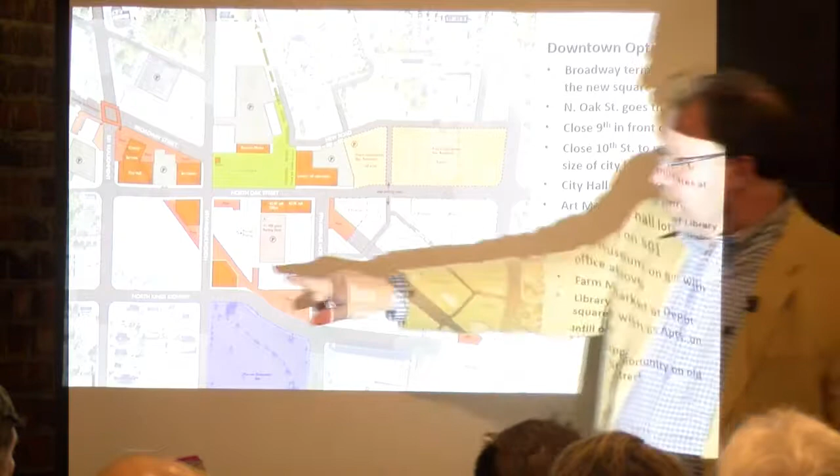And then when Main Street is abandoned, essentially as a right-of-way, you can carve out 2 new development sites within that big triangle that's there between 8th and Main that is now a little tucked in sort of parking lots. And so this is development on publicly owned land that returns money to the city. The apartments over the library, the art center return money to the city.

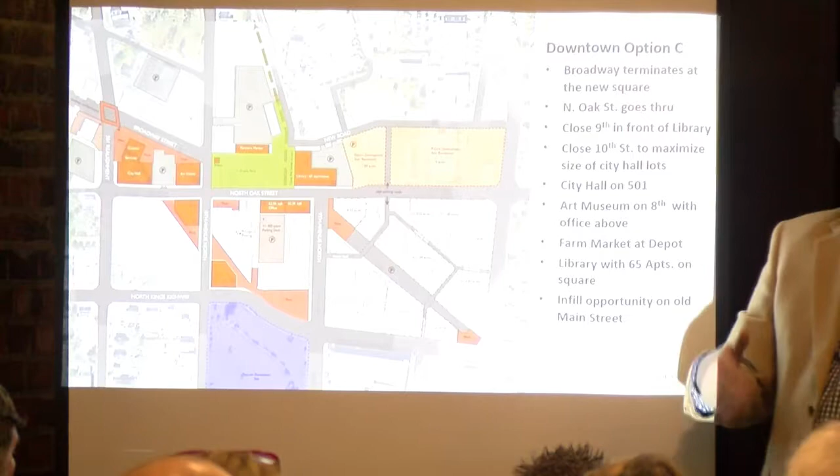And as all of this develops, this is the city, this is the farmer's market. As all of this develops and adds value to the old City Hall site and the remaining City Hall property on that block, the City Services Center here, this stuff adds value to everything else around it. And so you would sell this stuff later after you've established the nucleus and momentum of the new downtown.

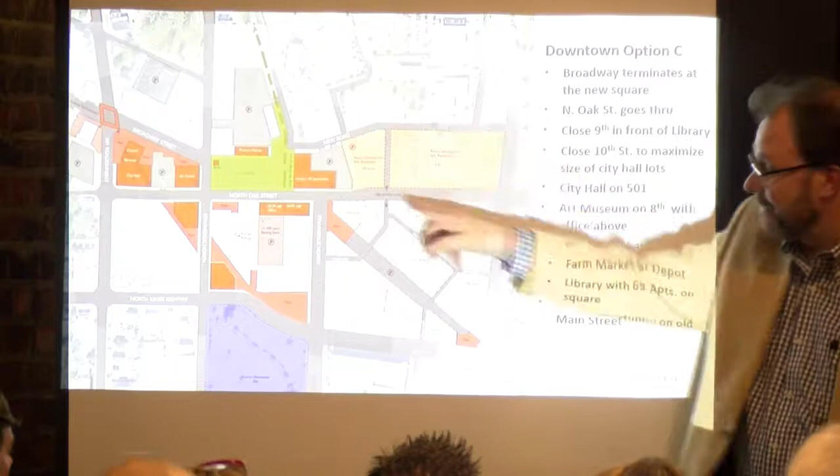And here, to maximize the value of these 2 sites, we close the orphaned piece of 10th Street and sell that land to a private developer because it's really not used. All these blocks have access from Joe White, North Oak, this new road, so you don't really need that. And these would be 2 really choice 5+ acre development sites that would work great for apartment complexes that have surface parking. You move the buildings up to the edge and sort of park it in the donut hole.

The library has about 65 apartments above it. The art museum has office, the farmer's market, and then there's infill opportunities on the old Main, as I mentioned. So that's concept C.

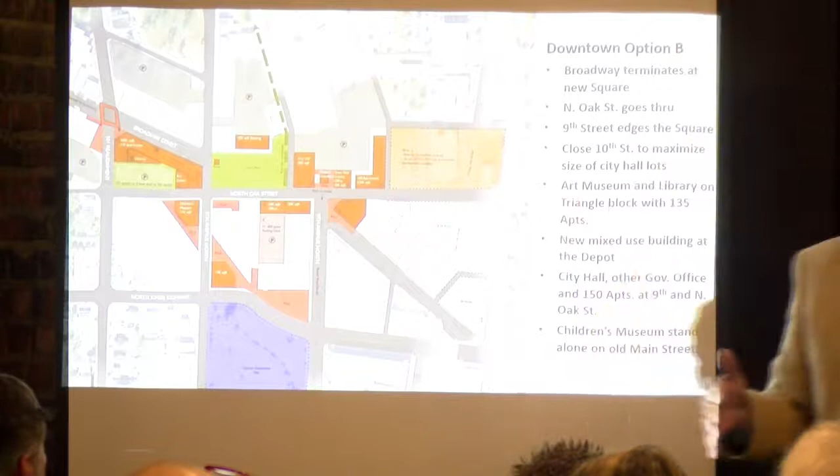We missed one. Yeah, B. This is my personal favorite. And so the same thing, you develop the square. Next to it is not the farmer's market now, it's a 32,000 square foot building, literally just to the right out the front door here. We could have ground floor retail, active use, maybe some apartments or office above it. So this square is a public project that comes with a private development opportunity.

On the triangle block now, you have the library at this corner, the art center at this corner, parking on the back side, and 2 or 3 levels of apartments on top of the library and the art museum. And we just did a very similar successful project in New Hanover County in downtown Wilmington, where the county basically sold the air above the library and the museum to a private developer, and the property tax from that development, now it's much bigger than yours, likely 10 or 12 stories, is gonna pay for the new museum and the new library over the next 28 years based on our calculations.

So by selling that air, you get a free library and a free art museum in New Hanover County. Now this one's only 2 stories, so that payback period would be much longer than 28 years, which is what it was in New Hanover.

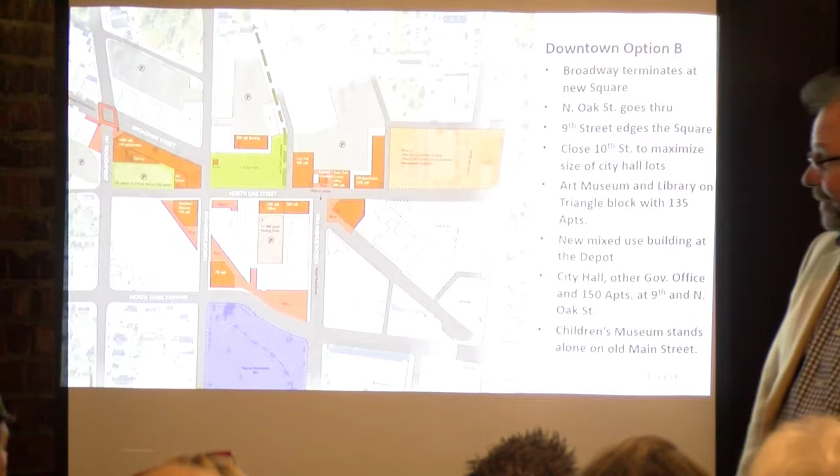And so then the city hall is on this side, so the square is bracketed by art museum, retail, city hall, the new office building, and maybe the children's museum in this corner. So the city hall administrative service functions are in this building in 2 stories. Then you have a separate little council meeting chamber. A lot of architects like to make the meeting hall for the council some kind of special architectural element.

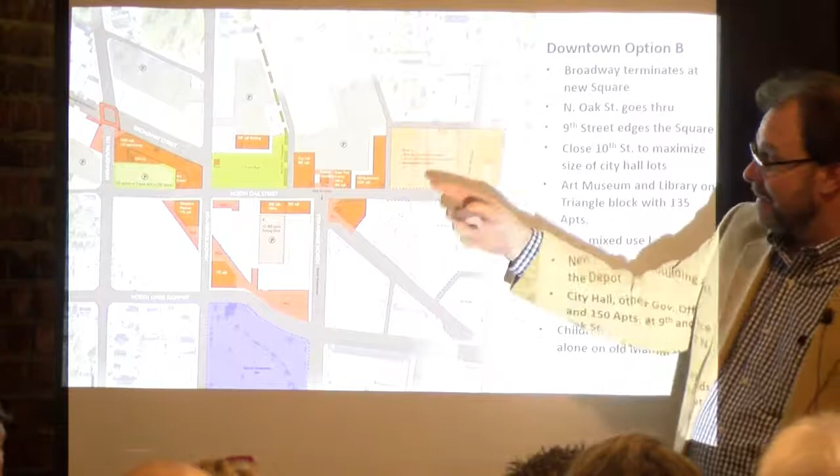And here it could be the terminated vista for 9th Street. And if the back wall is glass, while you're at a council meeting you literally could see the ocean behind them, which is your reason for being as a city. So symbolically, that's kind of cool, I think. And then the remaining piece of property on that block that's not used for city hall becomes 150 apartments, and as I mentioned, shares the parking with the city hall.

And then again, we closed 10th. This becomes a 6-acre redevelopment site in phase 2. This becomes a 5-acre redevelopment site in phase 2. And then at some point you sell or use the old city hall for something else. So in this one, you end up with about